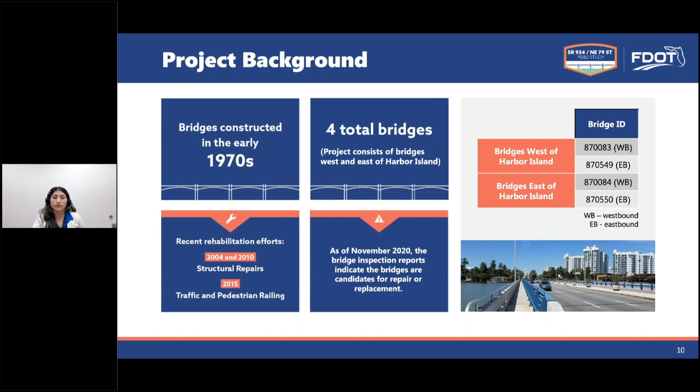The existing conditions: the bridges west of Harbor Island include 2 separate structures that carry eastbound and westbound traffic. The typical section consists of 6 lanes divided by a 15.5-foot wide raised median, with 2 11-foot inside travel lanes and 1 13.5-foot wide outside travel lane that shares its use with bicycle traffic. Curb and gutter are adjacent to the outside travel lanes, along with a 5-foot wide sidewalk.

The bridges east of Harbor Island are also 2 separate structures that carry eastbound and westbound traffic. The typical section consists of 6 lanes divided by a 15.5-foot raised median, with 10-foot wide travel lanes, a designated 5.5-foot wide bike lane, and curb and gutter, with a 4.5-foot sidewalk with a traffic railing separating pedestrians from traffic.

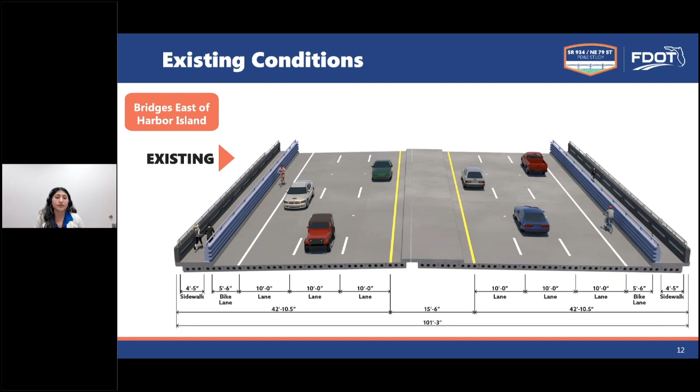The purpose of this project is to evaluate bridge replacement alternatives to address the deficiencies of 4 existing bridges, the 2 pairs. The project is needed to address bridge deficiencies and maintain emergency evacuation route and response time.

The existing bridges' substructure are more than 50 years old in a highly aggressive environment, showing signs of deterioration. As part of the inspection process, several structural components were evaluated and assigned a ranking or condition based on the National Bridge Inventory System.

As you can see to the right, the ranking on the deck and superstructure have a ranking of 4, and the substructure a ranking of 6 to 7.

As previously stated, the sufficiency rating of these 4 bridges is also below 50. This does not mean the bridges are unsafe. The department will continue to perform timely repairs to keep the bridges in good condition until they are eventually replaced. This PD&E is a class of action type 2 categorical exclusion, which means minimal environmental impacts are anticipated.

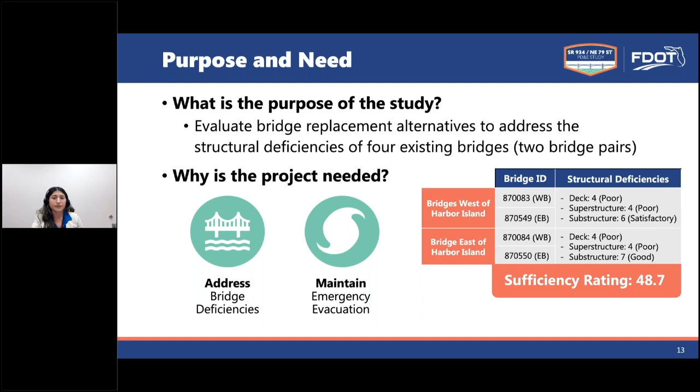Alternatives evaluation process is part of the PD&E study, which deals with the development, evaluating, and elimination of potential alternatives based on the purpose and need for the project. The alternatives evaluated process begins with engineering and environmental data collection, existing project conditions, and identifying resources. This information is then analyzed to identify key project issues and establish an evaluation criteria.

Prior to beginning the alternatives development, a typical section is determined. The typical section analysis includes number of lanes, lane widths, shoulders, and pedestrian and bike features. These are also evaluated against engineering and design criteria and environmental resources.

Each build alternative is then developed as it relates to roadway and bridge design criteria with the goal of minimizing impacts to the community and the natural and physical environments. Some of the design requirements include traffic, utilities, drainage, and so on.

Social, cultural, natural, and physical environments are also evaluated with the goal being to avoid or minimize impacts to these resources. Such criteria includes land use, mobility, wetlands, water quality, wildlife, traffic noise, and many more.

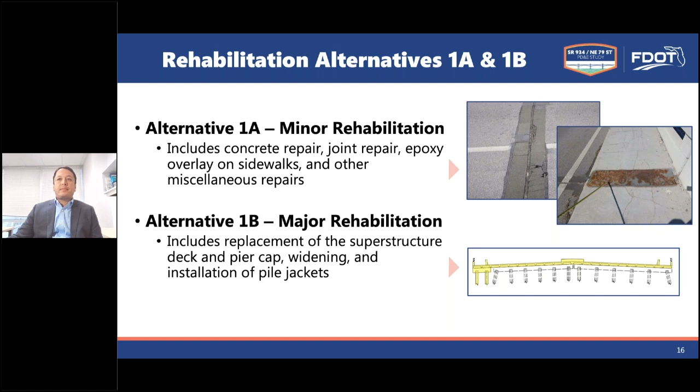So based on an evaluation of the minor and major rehabilitation options, we determined that alternative 1A and 1B were impractical alternatives. And there were a number of reasons that we eliminated them from further study.

First off, the rehabilitation solutions would not effectively address the structural deficiencies in the long term and address the need that was mentioned earlier in the presentation. Those structures are nearing the end of their useful design life.

In addition to that, the existing geometric substandard conditions that exist today would still remain with alternative 1A and 1B. And then the cost of the rehabilitation and the continued maintenance of those bridges would far outweigh the benefit and the service life of the bridges. For those reasons, alternative 1A and 1B were eliminated from further study.

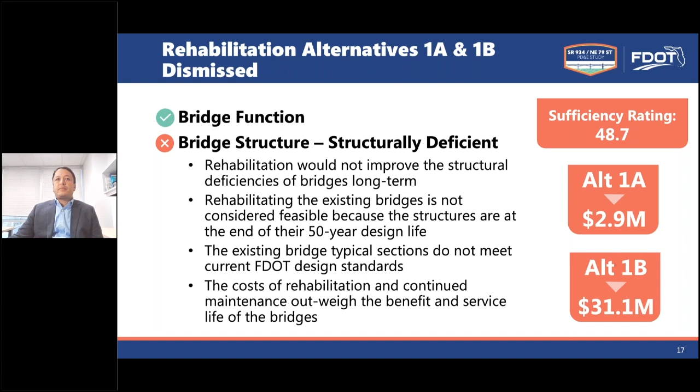In addition to that, we then began to look at bridge replacement alternatives and evaluated different options, and that's what we're presenting this evening.

As mentioned earlier, the first step in determining the bridge replacement alternatives was to determine a recommended typical section. Various typical section alternatives were evaluated, taking into account the different options for number of lanes, lane widths, inside and outside shoulder widths, pedestrian and bicycle accommodations, and the actual structure configuration. Different combinations of those elements were evaluated, then looked at in terms of functionality, safety, and constructability - could the replacement bridges be constructed while minimizing impacts?

The recommended typical section was presented at the public meeting held last November. The bridge replacement alternatives we're referring to throughout the PD&E study as alternative 2A and 2B share the same recommended typical section and the same structure type.

The typical section will consist of two 10-foot travel lanes in each direction, one 11-foot travel lane, and then an 8-foot 4-inch bike lane and a 6-foot sidewalk in each direction. There's also a concrete barrier that would separate the bike lane and the sidewalk.

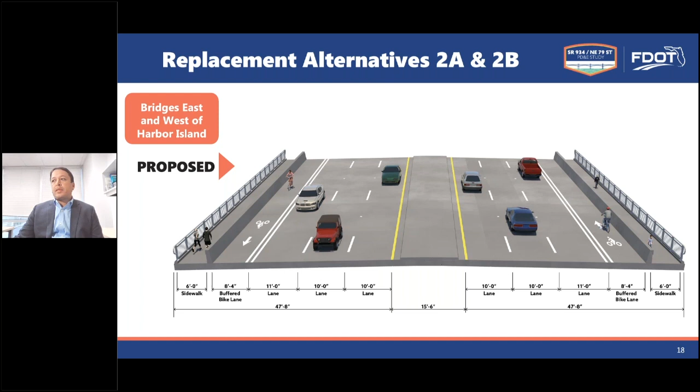That recommended typical section was then applied to the roadway and the bridge within the vicinity of the bridge pairs. The primary difference between alternatives 2A and 2B is the vertical bridge profile - the distance between the mean high water elevation of Biscayne Bay and the bottom of the lowest member of the structure. Alternative 2A has a vertical profile similar to the existing bridges, approximately 3 feet above the vertical clearance today above the bay.

Alternative 2B has a vertical profile that is raised to a minimum of approximately 7 feet, done to meet the sea level rise criteria, which would increase the vertical clearance over the mean high water for Biscayne Bay. Due to that increased profile, alternative 2B would require gravity walls or retaining walls, and also reconstruction of a number of driveways adjacent to the bridges as they tie back into the roadway, which I'll show in the next several slides.

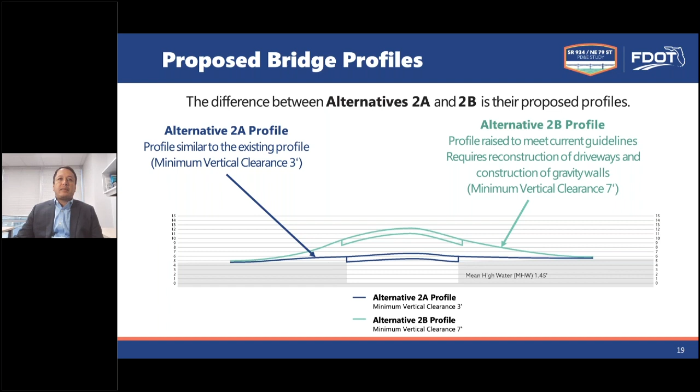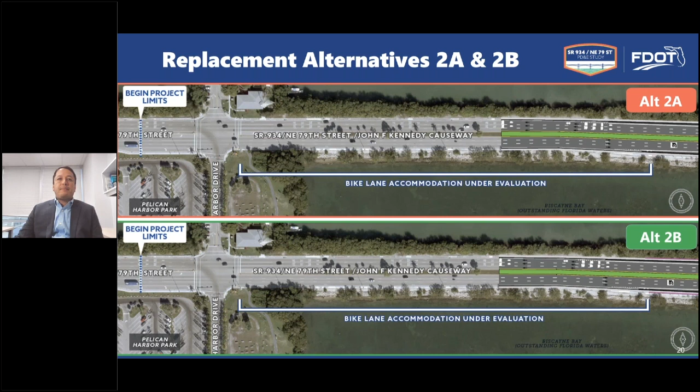As we look at the first bridge pair, alternative 2A is being replaced in kind. Alternative 2B, as mentioned, would need a retaining wall constructed as the bridge ties back into the roadway, shown in the purple lines just east and west of the bridges. For alternative 2B, we also have a temporary construction impact shown on the south side, resulting in temporary impacts to Pelican Harbor Park.

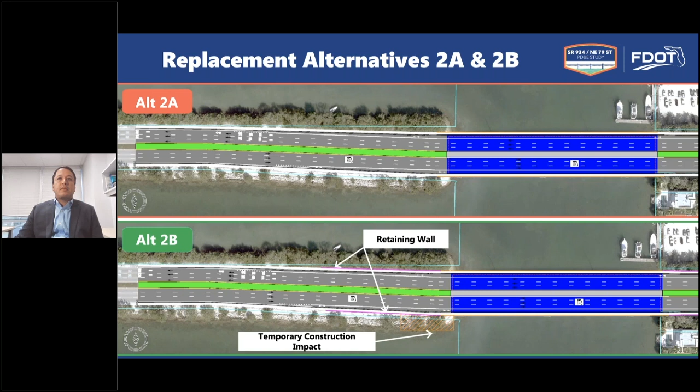As we move to the island, one of the items we're suggesting as part of this study for both alternatives is the removal of an existing mast arm signal that's there today, and closing the median at that same location on the east end of the island. That was there originally to accommodate the fire station on the north side of 79th Street, so we are proposing to have that removed.

For alternative 2B, again there would be a retaining wall required as a result of the bridge tying back into the roadway section. In this location we also have a number of driveway reconstructions that would need to occur, again as a result of the raised profile of alternative 2B.

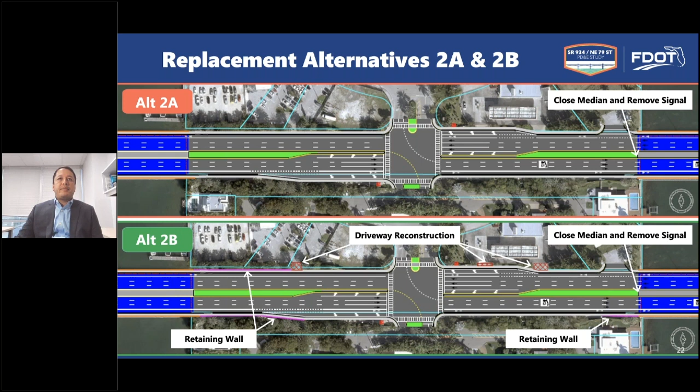As we look at the eastern bridge pair, alternative 2A again is replacing in kind. Alternative 2B again would require a retaining wall. We have a second temporary construction impact that would occur on the south side of 79th Street, and an additional driveway reconstruction that would need to occur on the south side as well, where the existing businesses are today.

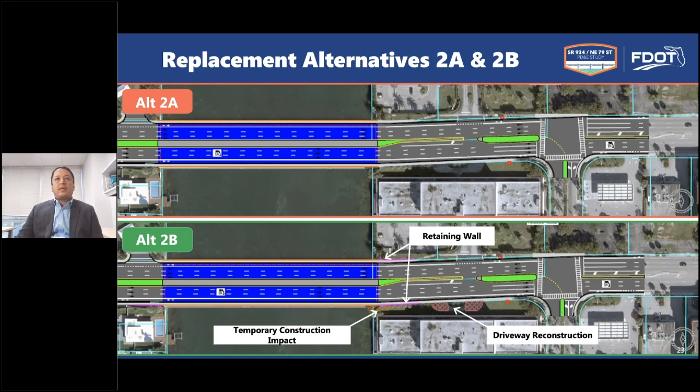One of the important elements of the PD&E study was to evaluate potential environmental impacts as well as benefits, with the location of the bridge replacement as the focus. The bridges cross Biscayne Bay, which is designated as an aquatic preserve, an outstanding Florida water, and also a state designated nursery for marine species.

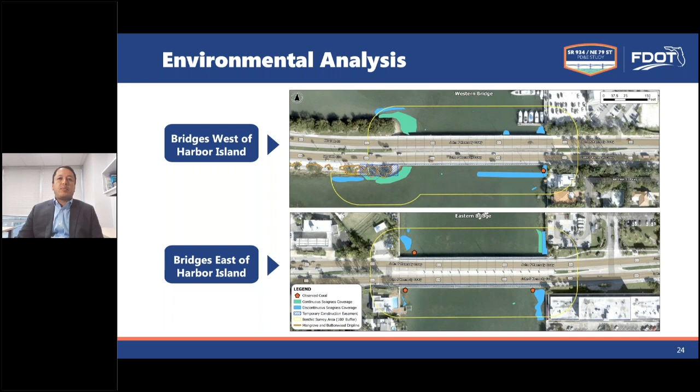Benthic surveys, which look at the water bottom, were conducted to delineate seagrass within the project area, document existing habitat conditions, and record any observations of protected species. The areas in blue and green on the screen represent areas where seagrasses are present.

In addition to our in-water surveys, we also collected data for a wide range of environmental resources, including various social, cultural, natural and physical features.

Through our data collection and analysis conducted for all the environmental resources, we've noted there would be no increase in traffic noise, and no impacts anticipated to air quality, contamination, archaeological resources, or community resources. Minimal impacts would likely occur to wetlands and seagrasses, and temporary impacts would occur to Pelican Harbor Park, which is a Section 4(f) resource.

That would occur as part of the construction, and the utilities currently located on the bridge. As we finalize our evaluation, we will also continue our coordination with the state and federal permitting agencies and begin to develop our mitigation plan for any impacts that might be unavoidable.

Anticipated impacts from the no build and the bridge replacement alternatives were compared, and the major differences between those alternatives are shown here on the screen. Major differences relate to how the alternatives meet the FDOT roadway and bridge criteria, their estimated service life, whether they meet the sea level rise requirements, cost, and potential environmental impacts.

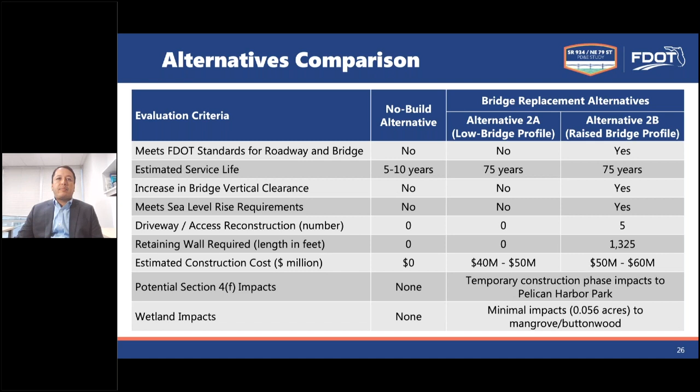The PD&E documents that we're currently preparing will describe the impacts in detail, and those reports will be made available for review by the public prior to the public hearing.

In terms of schedule, the PD&E started in May of 2022. It's anticipated to be complete by fall of next year. Following the meeting this evening and the in-person meeting this Thursday, the alternatives will be refined as needed.

The PD&E study documentation will be completed and made available prior to the public hearing, tentatively scheduled for April of next year. After the completion of the PD&E, a preferred alternative will move into design, which is currently funded for 2025, and then design will be followed by construction, funded for 2028.

There have been various opportunities for the public to provide input on this project, including the public kickoff meeting held late last year, and the meetings we're having this evening and this Thursday. Based on input received from previous meetings, as well as ongoing analysis during the PD&E study, a preferred alternative will be determined and presented back to the public at a future public hearing.

Input and information we receive at tonight's virtual meeting, as well as the meeting in person on Thursday, will all be taken into consideration as we prepare the final documents for this study. And with that, I'm going to turn it back over to Paulette.